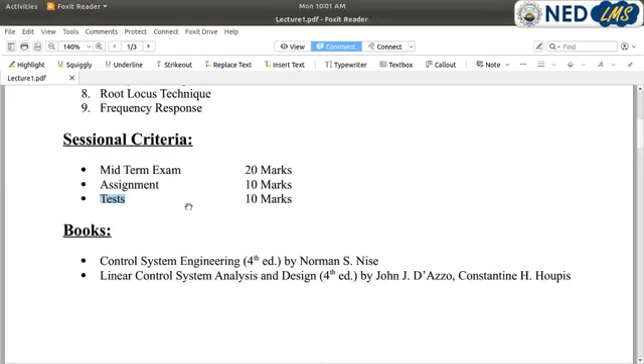Now, these are the 2 books I will be consulting, with this one as the textbook of the course.

Now let's start the course formally by defining a system. You must have studied what a system is. You can search for the word on Wikipedia also, just in case.

Here you can see the word system has broad meanings and can be applied in many fields like economics, human culture, science, etc. In engineering and physics, the definition is: a physical system is the portion of the universe that is being studied. So we can say anything which is under observation or study will become the system.

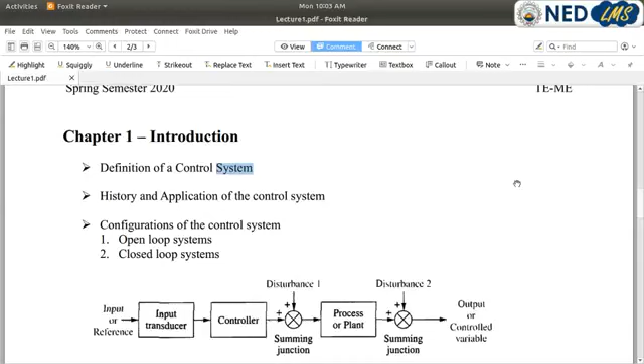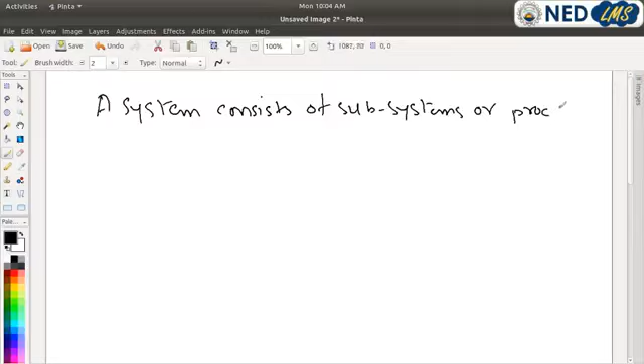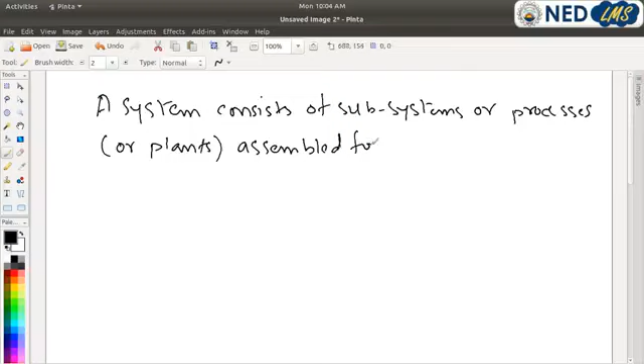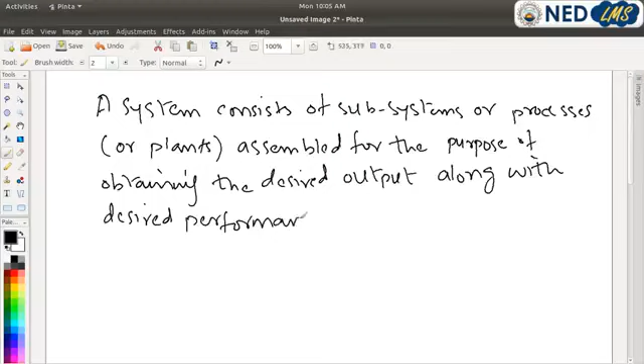So now let's define what a control system is. Control system is defined as a system consisting of subsystems or processes, or we can say plants, assembled for the purpose of obtaining the desired output along with desired performance, given a specified input.

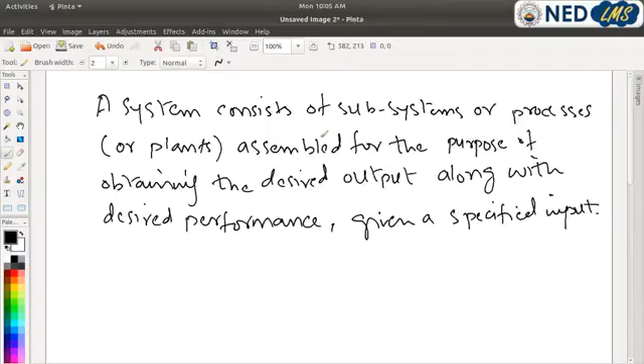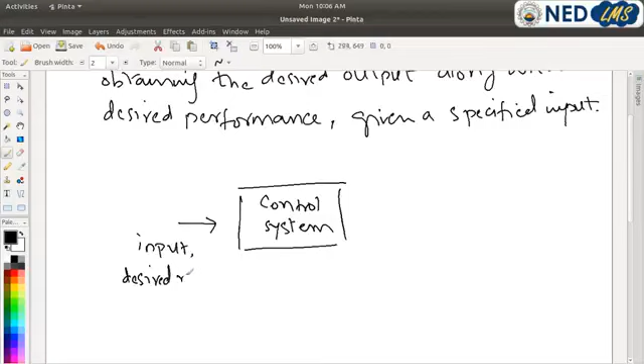So in a block diagram, this definition can be represented as a block containing a control system. Here we have input, or I can also say it as desired response, and finally this represents output of the system, or I can also write it as actual response of the system.

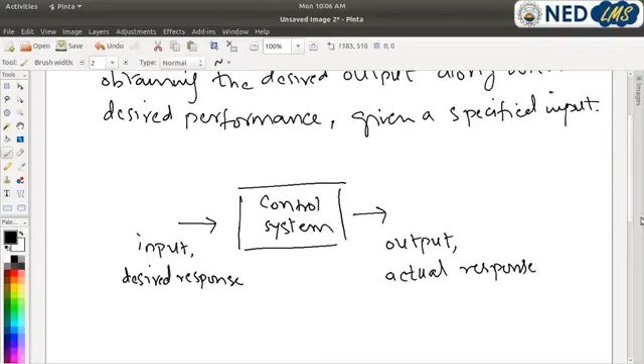Of course, the output or actual response of the system should be as close as possible to the input or desired response. That's what a control system is designed for, but it can never be exactly equal to the desired response due to physical limitations.

For example, consider an elevator. If we press the button to reach the fourth floor of the building, let's say, the elevator starts to move upward with a speed comfortable for passengers. We can say that will become our design criteria, and after some time it will reach the fourth floor.

We can graphically represent the position of the elevator with respect to time, here showing a constant set point representing the fourth floor. This will be the elevator location, and this will become time, and here we go.

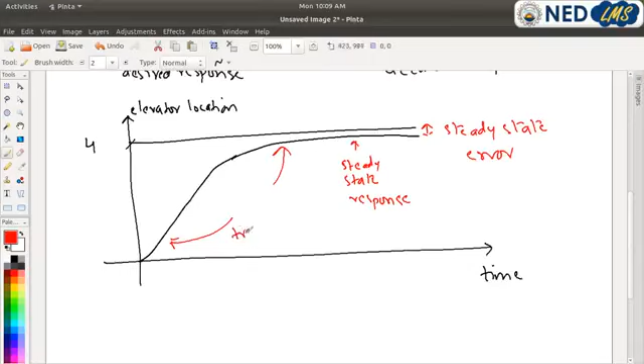This will be our steady state response, this will be the steady state error, and this will be the transient response of the system.

And this represents the input command.

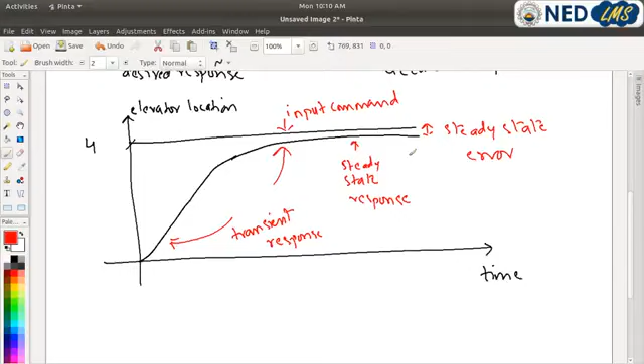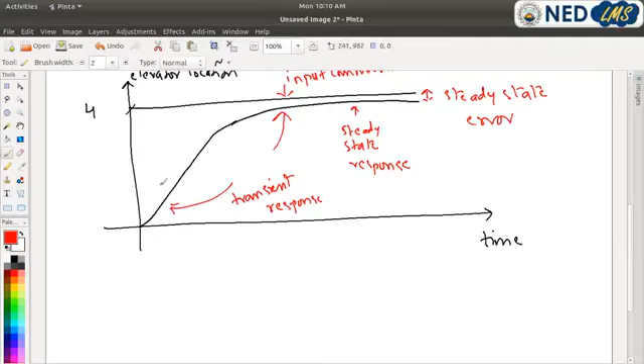Here we can see the push button we press was the input, or the desired response, represented as the step input in the figure, and the response of the elevator is the actual response of the system after the application of the step input. By looking at the figure, it is apparent that the output response comprises two responses, which we call output response or elevator response.

Output response is equal to the transient response plus the steady state response.

The performance of the elevator is dependent on these two responses. Too slow a transient response will make the passengers impatient, and too fast will make them uncomfortable. So we can say passengers' comfort and patience is dependent upon this transient response.

Similarly, steady state error is also an important parameter, since steady state error is related to the steady state response, so we can say the steady state response can also become our design criteria. Steady state error is important because passenger safety and convenience would be sacrificed if the elevator did not level properly with the floor.

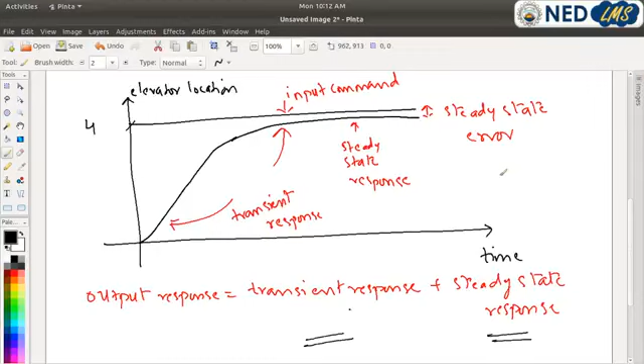So that was all about the definition of the control system.

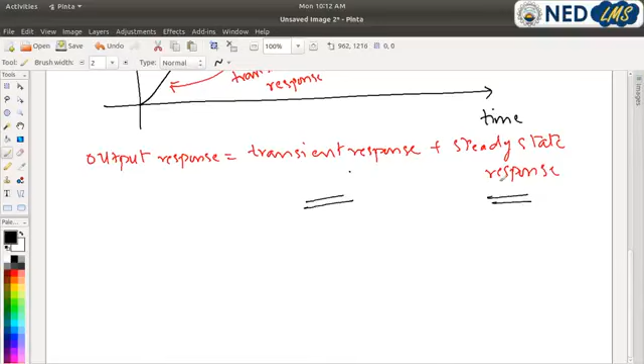Now the next topic is the history and application of the control system. This topic will be your assignment to search and study. It has no critical concepts behind it, so you guys can cover it on your own, I hope, I suppose.

Now the next topic in the sequence is the configuration of control systems. There are two major configurations of control systems: one is the open loop system and the other is the closed loop system.

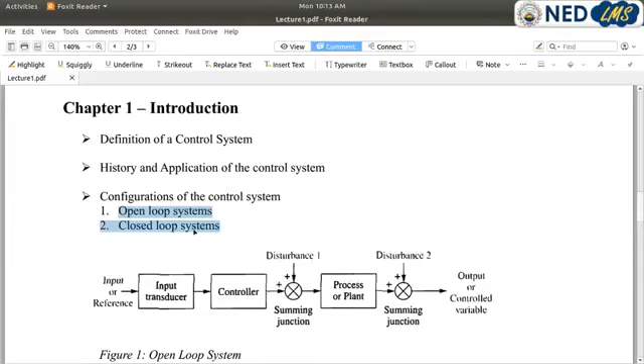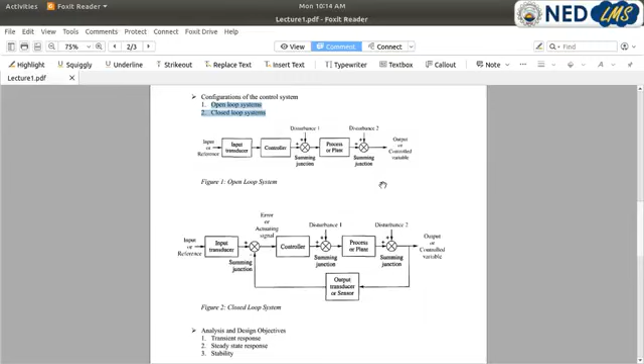Here you can see the generalized block diagram of both open loop and closed loop systems. It starts with a subsystem named input transducer, which converts the form of the input to be used by the controller.

For example, in case of AC, the digital set point given through the remote controller is converted to the equivalent voltage, which is then used as the set point of the controller subsystem present in the AC.

The controller subsystem drives the process or plant. The plant subsystem is actually responsible for the conversion of input to output. For example, in case of AC, the plant will be the compressor of the AC as it is responsible for the cooling. The main distinguishing characteristic of the open loop system is that it cannot compensate for disturbances or noises that are being added to the system.

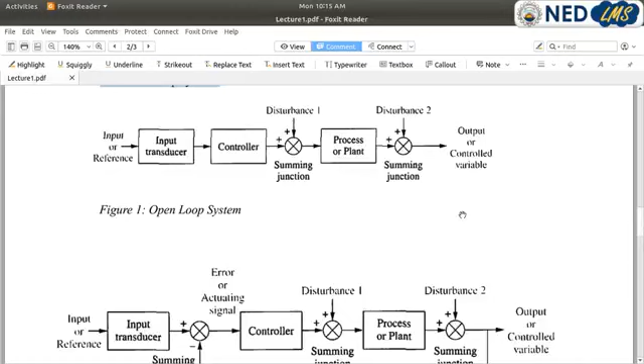The disturbance can be wanted or can be unwanted. Just for the sake of understanding, consider a vessel...

Consider a vessel containing water with a heater, to be heated with an electric heater. We can model an electric heater with a resistor having a large resistance with high power dissipating capability.

Let's say the voltage applied to the heater is 100 volts, resistance is 10 ohms, and the mass of the water is 10 kg. Consider that the change in temperature needed is 10 degrees C.

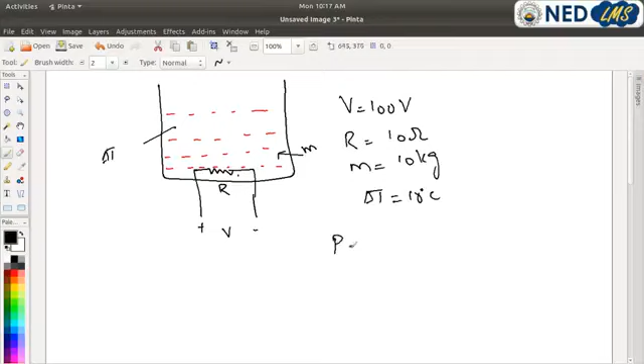Now we can calculate the power being dissipated in the resistor using the formula. Power dissipated is V squared over R. The applied voltage is 100 and the resistance is 10, so I get 1000 watts. That is the power being generated by the resistor.

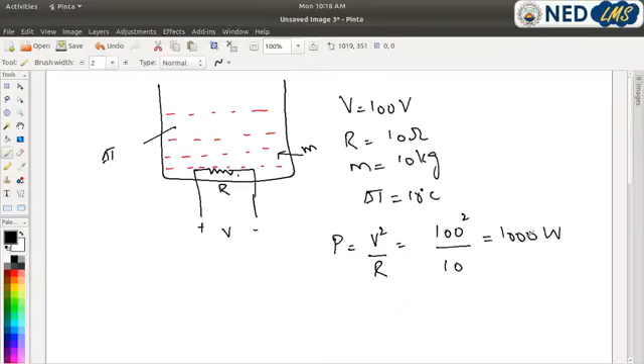Let's say all of the heat generated by the resistor is absorbed by the water in the vessel. So I can write Q equals mc delta T. You guys might be familiar with this formula.

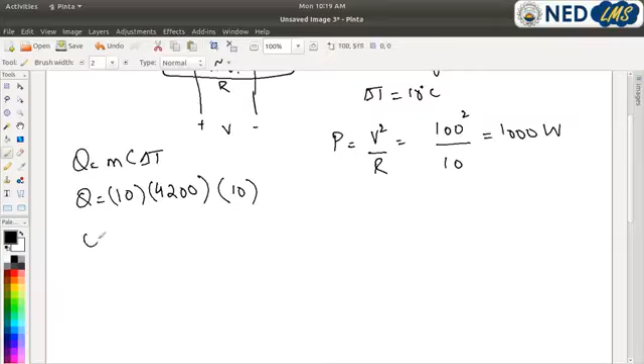Here we have the mass of the water, which is 10 kg. C is the specific heat, which is 4200 joules per kilogram per degree C, and the needed temperature rise is 10. So I get the answer 420000 joules. So this amount of heat is required to raise the temperature of the water in the vessel by 10 degrees C.

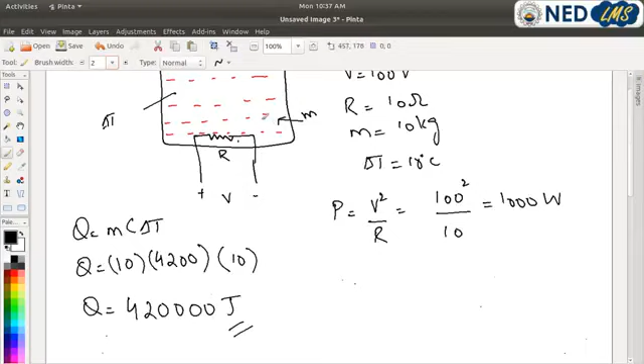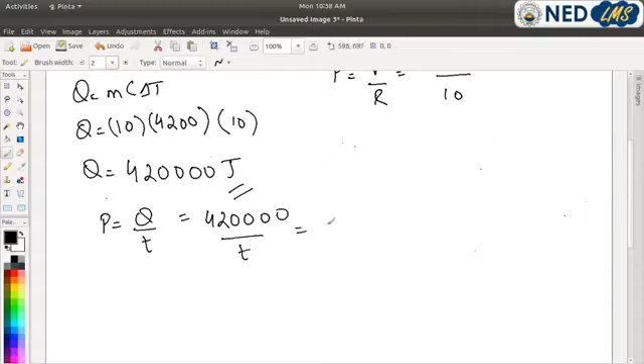Since the heat generated by the heater is absorbed in the water present in the vessel, I can write P equals Q over T, which is the definition of power. 420000 over time equals 1000, since the power is 1000, and T becomes 420 seconds. So it will take 420 seconds to heat the 10 kg of water by 10 degrees C.

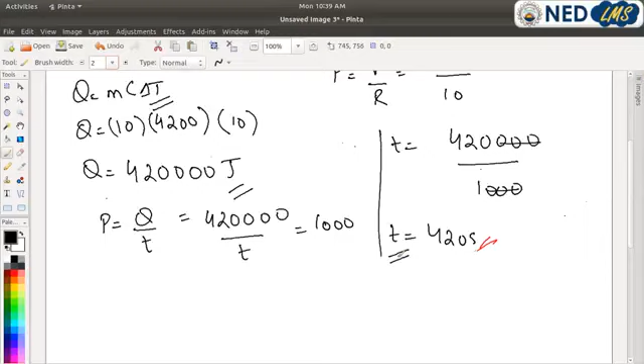Of course, we can reduce this time by taking a heater with high power dissipating capability. Now we can design an open loop control system for this heater, which will take the temperature change as a set point and will turn on the heater for a specific amount of time, by considering the same system.

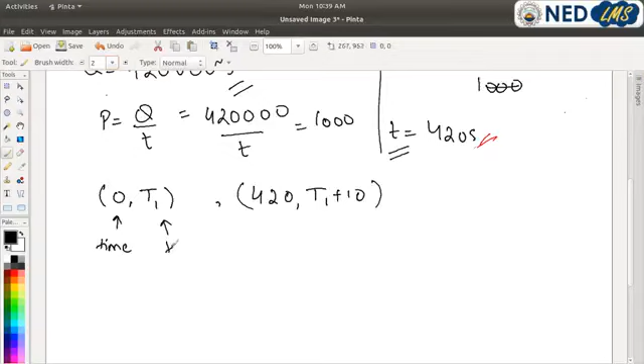So let's derive the equation of the required time for any arbitrary temperature change by considering the two points formula. Here we have (0, T1), and the second point is (420, T1 plus 10). This is the time axis, and this is the temperature axis.

At the start, the heater is off, so here we have 0 seconds. Let's say initially the water is at temperature T1. After 420 seconds, the water will be at T1 plus 10 degrees C.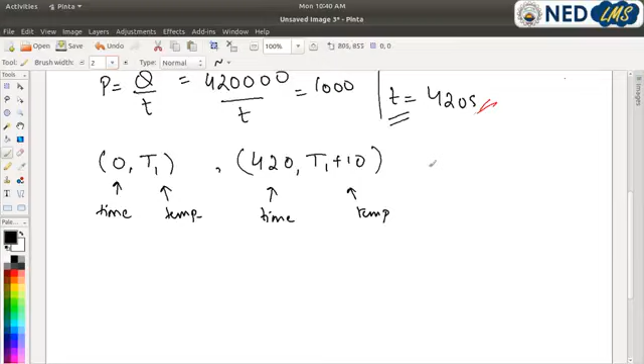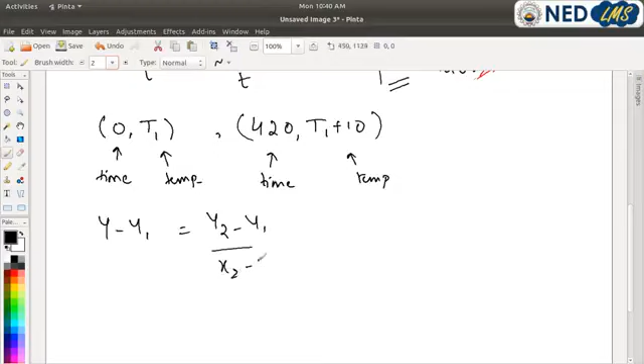So I can use these 2 points to find out the equation that will relate the time and the change in temperature. Using the 2 points formula, y minus y1 equals y2 minus y1 over x2 minus x1, times x minus x1.

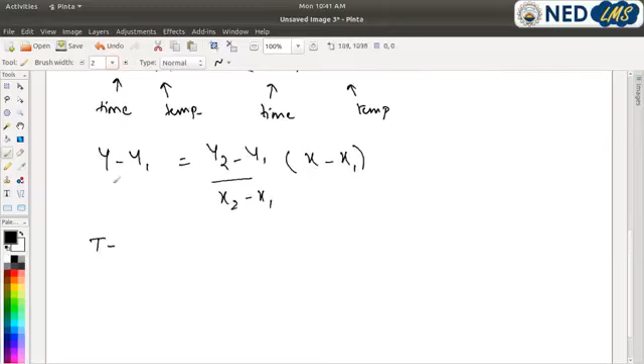So here y is the temperature and x is the time. So I can write T minus y1 is T1, equals y2 minus y1, which is T1 plus 10 minus T1, which will be 10, over x2 minus x1, which is 420 minus 0, it will become 420, and the x-axis is time t, minus x1 which is 0.

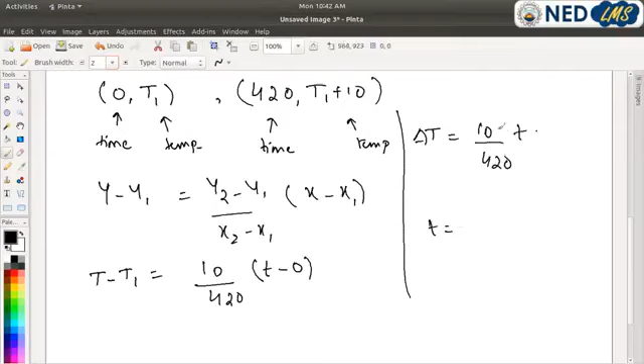Now this T minus T1 represents the change in temperature. So I can write it as delta T equals 10 over 420 into time, and T equals, here they get cancelled, 42 delta T. This will be the required

controlling equation. Now this equation can be used to design an open loop system with a temperature set point, which is then converted to a time interval using this equation, required for the heater to be turned on in order to achieve that temperature set point.

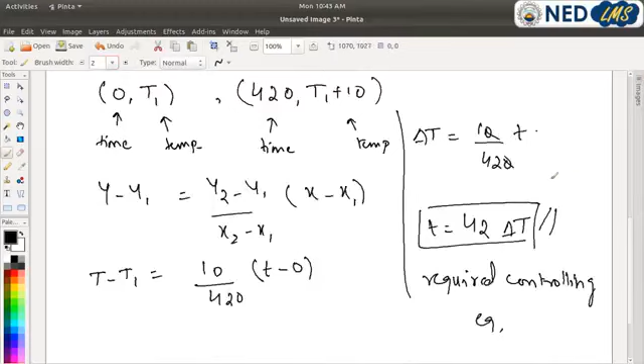Let's say now we add some disturbance in the system by including more water in the vessel. The controller will never be able to cope with this disturbance as it has no means to measure this change, and eventually it will stop the heater even when the temperature has not reached the desired value. Also, the unwanted disturbance can't be compensated in the open loop system, which is a major drawback.

That's why open loop systems are never used in critical applications where the deviation from desired input cannot be compromised. All the control systems present in industry are therefore closed loop in configuration.

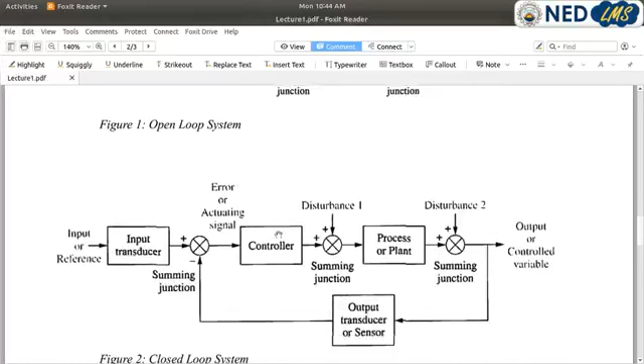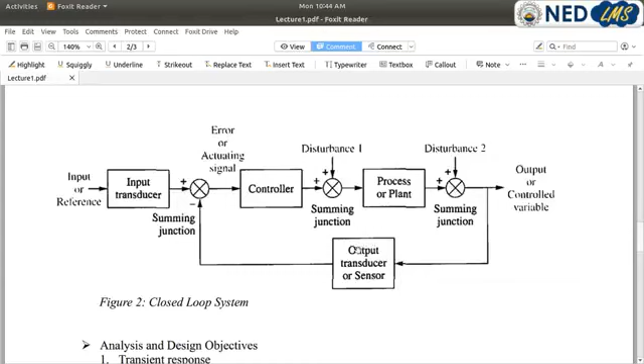The drawback of the open loop system is well compensated in the closed loop system, also known as a feedback control system. It compensates the disturbance by measuring the output response and feeding it through a feedback path, comparing it with the input at the summing junction. If there is any difference, the system will drive the plant to make the correction in the output response.

So in the example of the open loop temperature control system we just discussed, we can add a sensor that will measure the temperature of the water in the vessel, feeding it back for comparing it with a set point. This configuration will compensate for any disturbance, like the one we created by adding more water in the vessel.

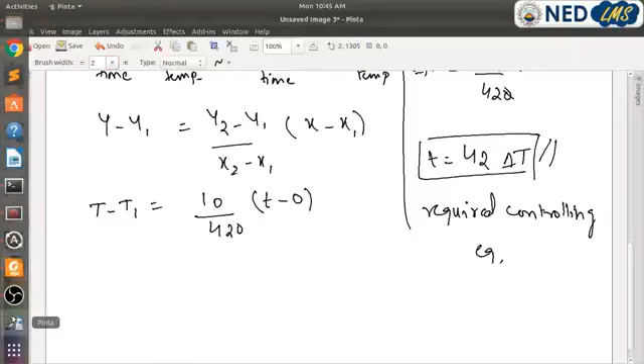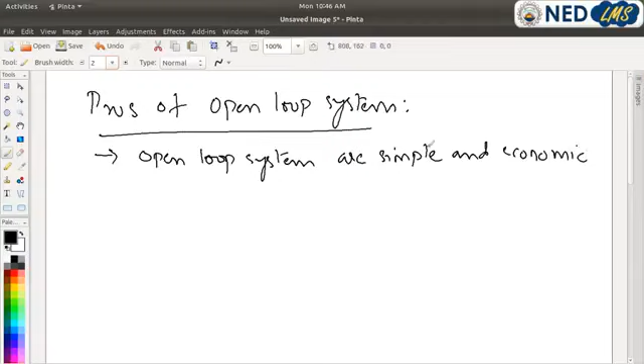So let's summarize the discussion by highlighting the pros and cons of both systems. Pros of open loop systems: first, they are simple and economic, since there is no feedback path and the design of the controller is also simple. The construction is easier, and more importantly, they are generally stable.

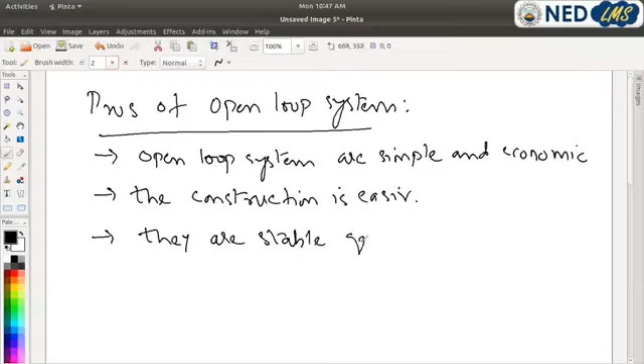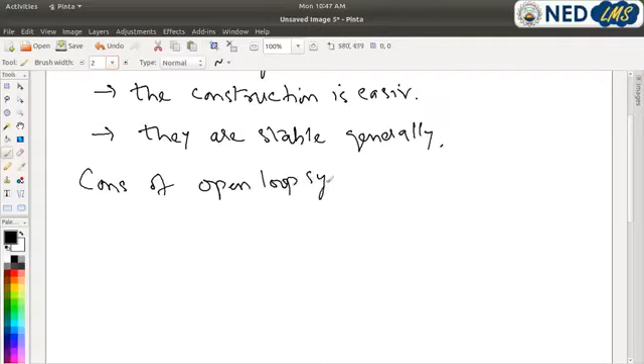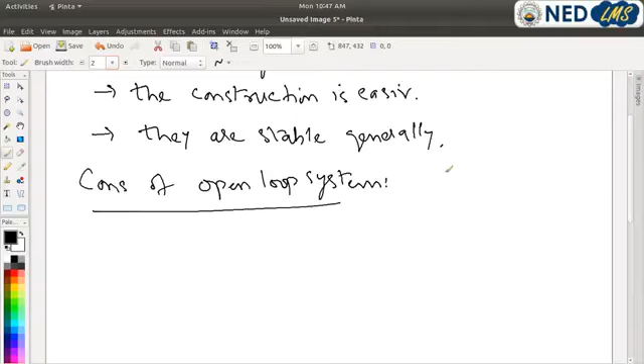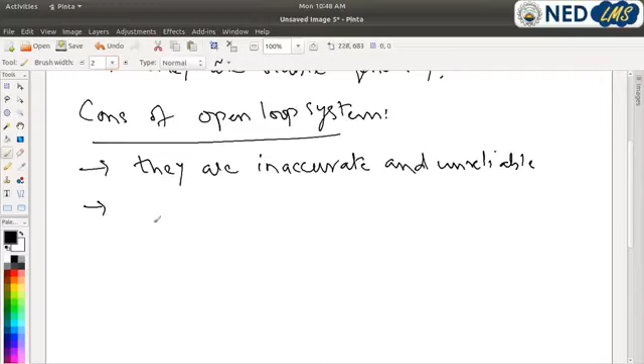Now the cons of the open loop system - I hope you won't mind my bad handwriting, since I'm still practicing how to use this graphic tablet - they are inaccurate and unreliable, and they cannot compensate the disturbance automatically.

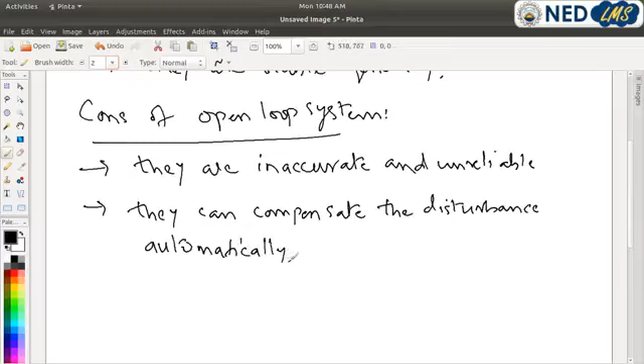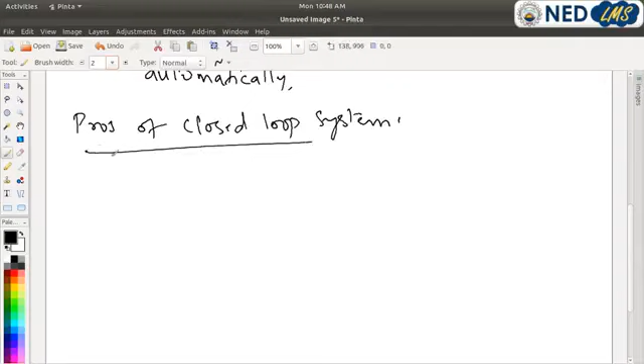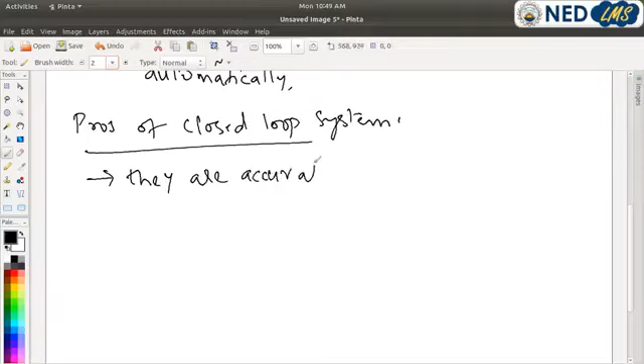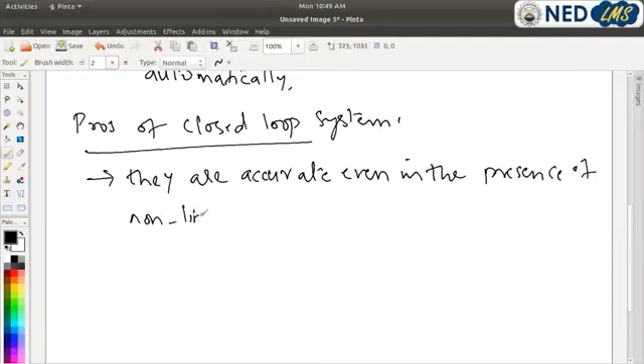Now let's define the pros of the closed loop system. They are accurate even in the presence of nonlinearities, and secondly, they are not affected by noise.

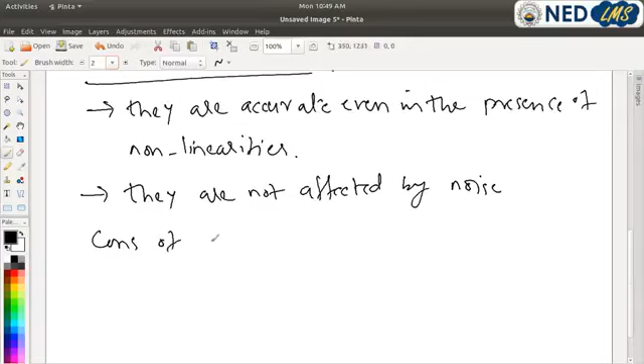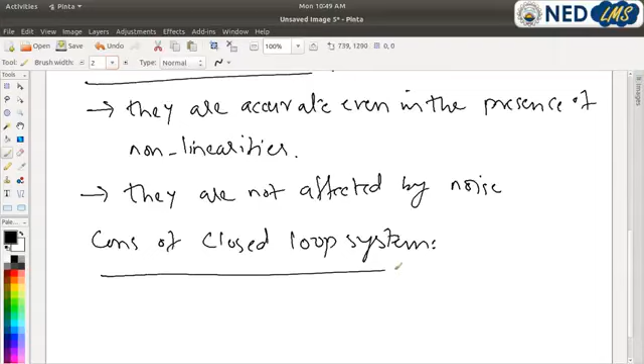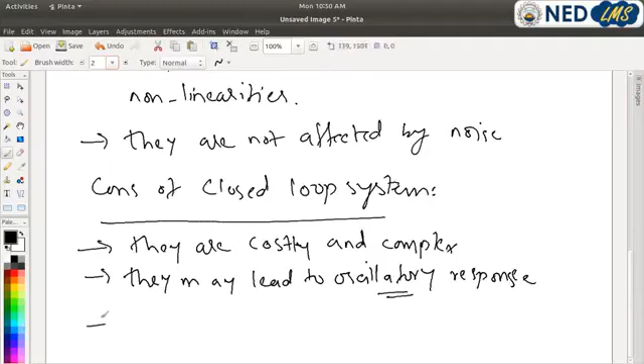The cons of closed loop systems: they are costly and complex, they may lead to oscillatory response - we will see what this term means - and of course stability is a major concern.

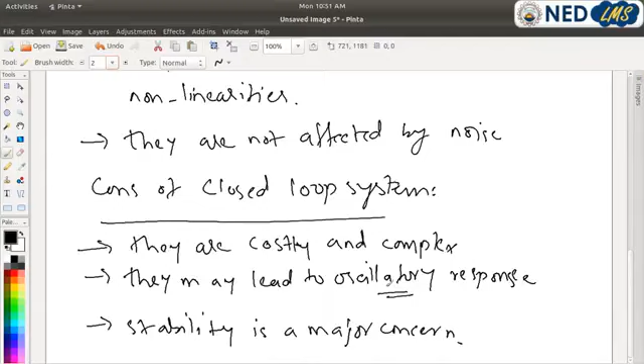So that was all about the configuration of the system. Now the next topic in our sequence is the analysis and design objectives of a control system. Here, the word analysis describes the process by which a system's performance is determined. For example, we evaluate the transient response and steady state error of a system to determine if they meet the desired specification.

The word design describes the process by which a system's performance is created or changed. For example, if a system's transient response and steady-state response does not meet the desired specification, then we change the system's parameters or add some additional components to meet the specification.

So we have three major analysis and design objectives: one is the transient response of the system, second is steady state response, and the third is the stability of the system.